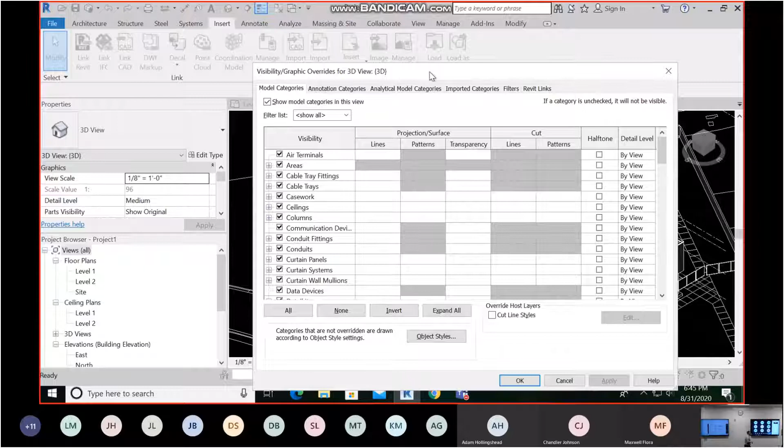There's multiple tabs right here. So your model category is pretty much anything that has a family to it. So Revit family, you guys know what those are from the Revit class, right? The couch you bring in is a Revit family. The wall is a Revit family. So all those modeling components are under model categories. So you can turn all those off simultaneously. Okay. The other one is annotation categories. This controls your text, your tags, elevations, levels, grids, sections, things like that.

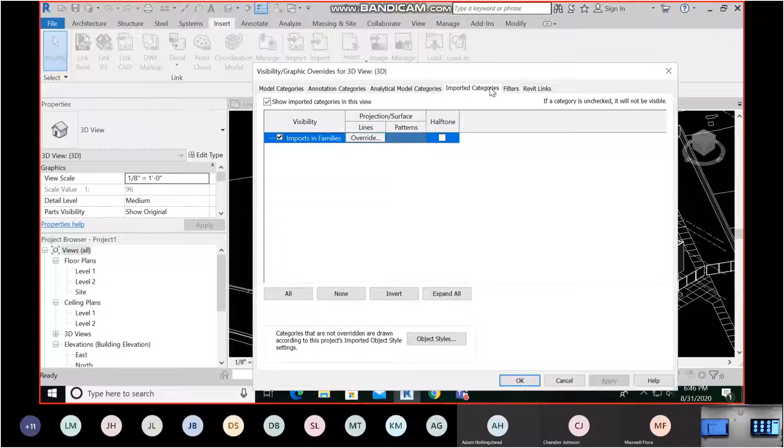Okay. Analytical model categories, I don't touch at all. I don't really do the analytical side of it. To be honest, I don't really know what it does, if I'm being 100% transparent with you guys. Imported categories, those are going to be DWGs that you end up bringing into Revit. So just like how you can link another Revit file on top of another Revit file, you can link a CAD file on top of it. You can even link a Navisworks file into it, depending on what year you're working in Revit.

You can link a point cloud, which is kind of what we're going to talk about today, a point cloud. But you'll be able to control all your CAD files from imported categories. If you bring in a DWG or an NWD, it will come in here. It will create a new tab. Same with the point cloud. It will create a new tab.

Okay. Filters. Filters are one of those things that we're going to do in the semester. You can create a filter, which is basically like a rule saying, if I'm looking for this specific information within this specific file, I want you to do this with it. So for instance, one thing we do in the class with filters is we color code everything. So cold water, we make it blue. Hot water, we make it red.

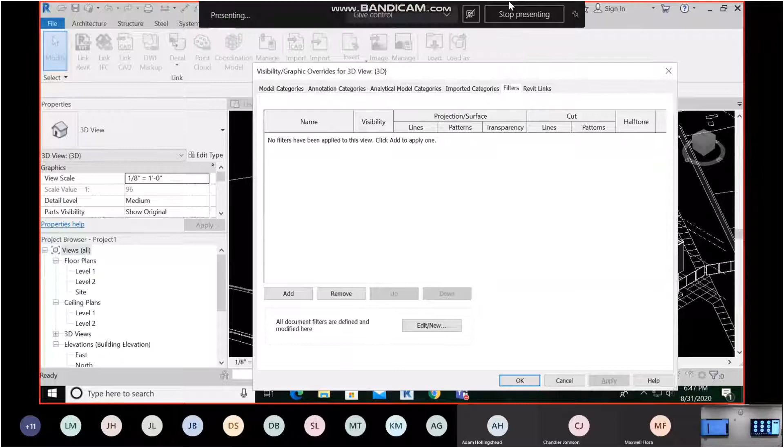And then the hot water return is kind of the other one we touch in here. We make it kind of like pink. That way it's easily identifiable when you're working in your file to know what you're actually touching, okay? And then you can turn filters on, you can turn filters off, show things without showing things. It makes it easier to make your view customizable. And then what we want is Revit links, okay? So on the far right one, Revit links.

Now if I wanted to figure out if my structural file is on top of it, sorry for the people online with the shared screen, I'm gonna put it over here. I'm gonna hit a checkbox, and I'm gonna hit apply. And when I hit apply, I'll notice one disappears, one stays, right? So I'll do the vice versa. I'll hit architecture, hit apply, everything disappears, turn structure back on, structure appears, architecture, hit apply, it appears, okay? I just do a quick visual check to make sure that that's showing up, okay?

Now, in your architectural file and your structural file, we won't get into that this class, it'll be kind of next class. If you want to make things disappear within Revit, you can manually turn things on and turn things off within your linked file, okay? So for example, I'll quickly show you. There's this kind of wall that's going around. Or actually, we'll just do this site work, okay?

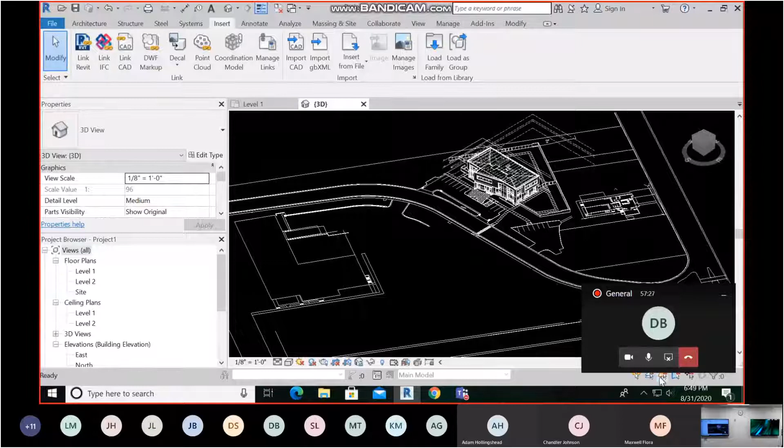So if I come in here and I turn off my red check so I can actually be able to touch something, okay, and I come in here, right here it's under model group, site plan, or another good one that usually shows up is these walls, so site, okay? If I wanted to turn that site element off within my linked file, there's a couple different routes I need to go. One, sometimes it works, sometimes it doesn't, is you can just turn it off in model categories right here.

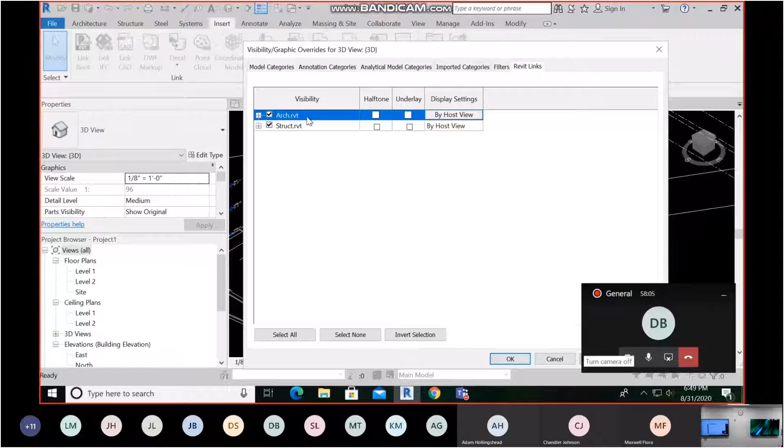The surefire way to do it is to go into Revit links, okay? Underneath your architect, you want to identify which file it's in first. So this is under the architectural file that I've currently linked in. Under display settings, I can change this to custom. So if I change this to custom, now I can go through and everything that's in that linked file, I can manipulate. I can't move stuff around in the linked file. I can turn things off, I can turn things on, and I can color things as I see fit, okay?

So change it to custom. In model categories, I also change that to custom. And now I can scroll down or hit S and hit site, okay. And you'll notice that site wall is now gone, right? So I don't want to see that site wall on my floor plan, so turn it off. So under that visibility graphics, that's how you do that. Instead of trying to hide every single element, just super fast, easy, hide it, get it done.

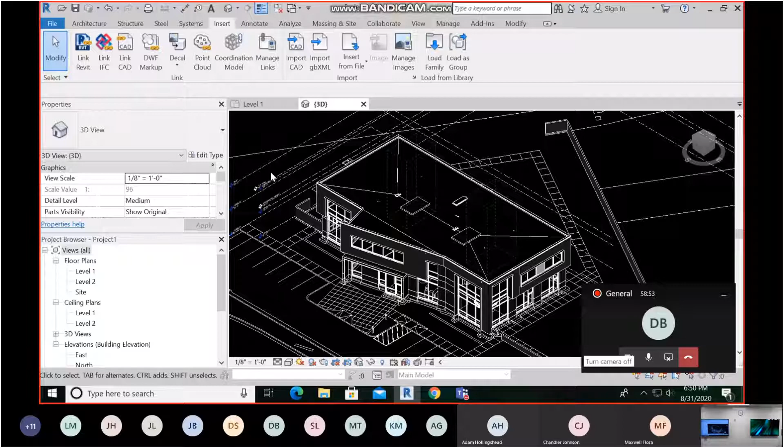Does anybody know why I want to hide stuff? If I'm looking at this floor plan right here and I want to put this on a sheet, why would I hide stuff within that view? Super busy, super confusing, right? So besides the site, which is obvious, for the assignment that we're going to talk about today, everybody opens up level 1, okay? Go to your visibility graphics, open that up.

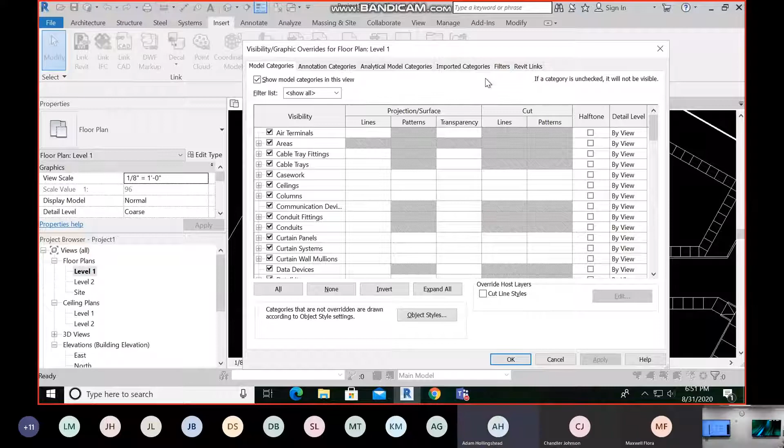We're going to go turn off all those elements, okay? So we're going to have just a basic level 1 that just shows doors, windows, walls, stairs. And the reason why is because, like you guys said, I don't want to see cluttered up sheets. After this assignment, it's cluttered up enough, okay? So I'll go Revit links. I'm going to turn off my structural model because for this assignment, we don't need it. We're just going to have our architectural, and we'll go by host view, go custom. And all this is being recorded too, for those of you who are online or fall behind.

So go custom, model categories, custom. And I'm going to go through and turn everything off except for doors, walls, windows. Generally, windows also fall under curtain walls, curtain wall mullions, curtain wall systems, and stairs. And the fast way to do this is you can select all. So if you select all and hit a checkbox, it turns everything off. Select all, hit checkbox, turns everything on.

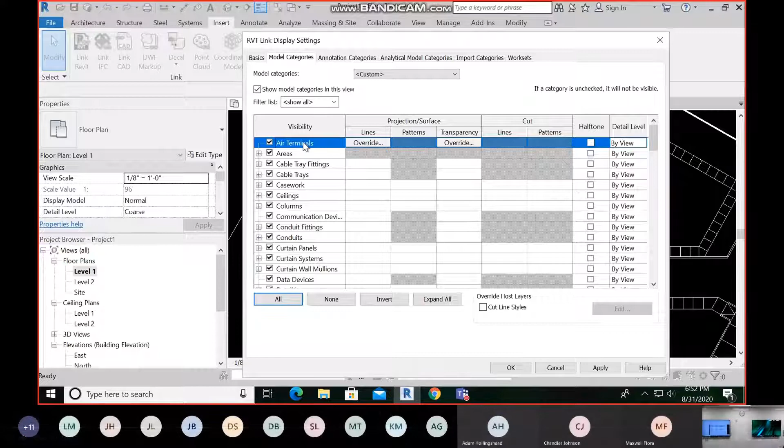What I like to do is use my down arrow on my keyboard and my space. So I hit space, it toggles that check on and off. And down and up arrow change which direction it's going. So if I just come in here and start going like this, now I hit curtain panels, curtain systems, and curtain wall mullions. I want to keep those on. Doors keep on. Keep going, turning everything off. Here's what I'm going to keep on. Walls keep on, windows keep on.

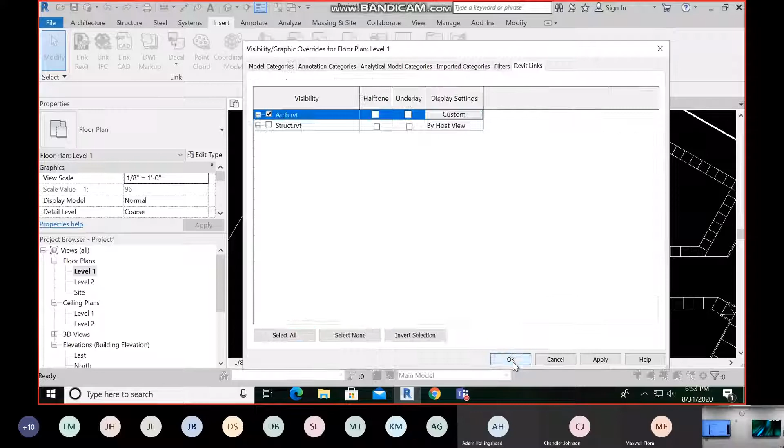Okay, I'm going to hit OK and OK. And you'll see how everything just disappeared, gone, right? You don't need to keep railings now. So this just basically cleared up my view to what I want it to be. I only want to show very few things, so I know what I need to look at, what I don't, okay? Another thing is if you guys want to see a black background like mine, I can show you how to do that. Some people hate it, some people don't.